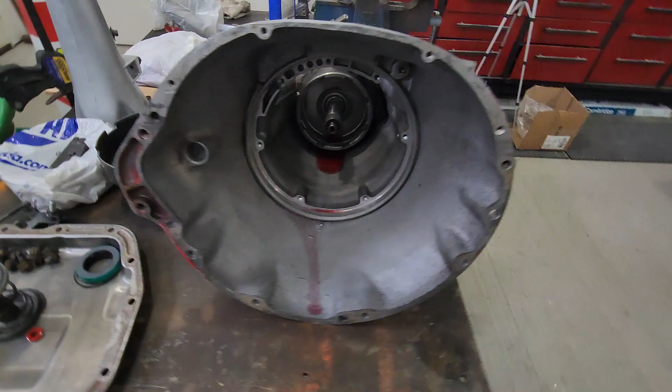So, on to the next step: installing servos into the transmission. Now they are all cleaned and I have all the new seals and gaskets installed, and the steel rings installed as well too. They're all ready to go. So all we're going to do is get this well lubed up and get them in. Hopefully everything goes smooth. I'm going to use my C-clamp again to compress these gently just so I can get the snap rings in. But I don't anticipate any problems, so let's get at her.

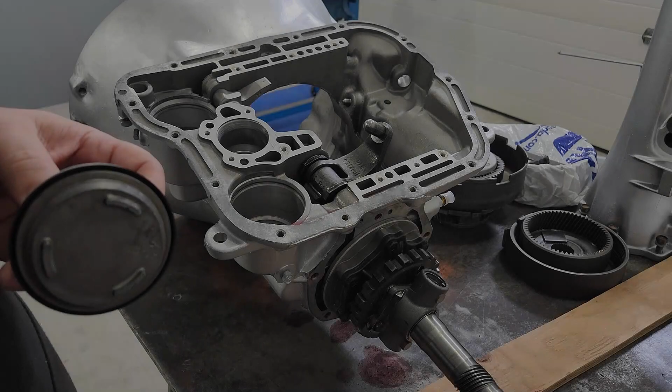So as with everything on here, transmission fluid on all surfaces. Anything that's touching, sliding, moving, anything that's rubber, everything in general. Get everything lubed up nice just to make sure we don't have any issues. We don't want to rip or tear any of the seals at all. We don't want to score things up. We want things to move nice.

So this is the bottom part of this servo here. It was just a lip seal that I had to replace on this. The plunger here, there's a snap ring, but there's no kit that goes in here. So I washed this out. It's moving nice and smooth, so we should be good there. That's that part.

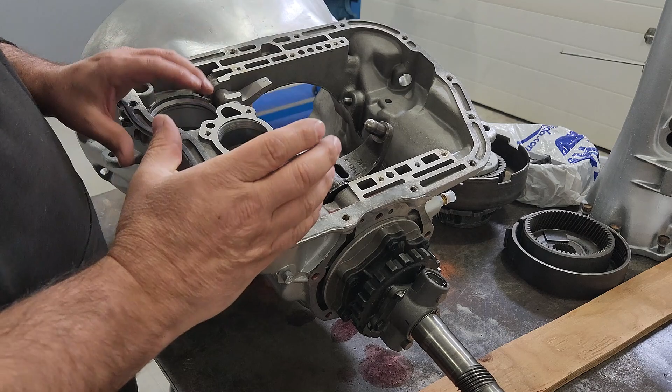Now this one's a pretty easy fit. Nothing too fancy about it. Just gonna make sure you kind of rotate as you go, so that lip seal stays - it's like a cup, it's kind of shaped this way. You want to make sure it doesn't roll up on itself. You want to get it kind of tucked in. There's a tapered edge, so it drops right down nice.

Then we got the spring. And just like anything else, where any surfaces meet, because they're going to be touching together for a while, we're going to make sure we get them lubed up. And everything is good. That all holds in there nice, and this will end up coming down as the adjustment for it. So everything looks good there.

All I got to do now is get my clamp to hold that down so I can get my snap ring in place. Well, that kind of went way faster and way easier than I thought, and I didn't even have to use a C-clamp. I assembled it together, lubed it up, assembled it together. I put the clamp on top and thought I'd see if I could push it down with my hand, and it went down so nice, and I snapped the clip in and it was done. That was it. So that one went in quite well.

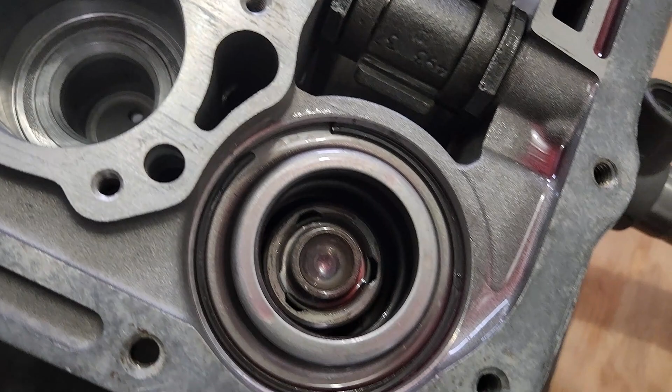So let's see if we can get a look in here, so you can see what the servo looks like inside. That's the part there that's pushing against the spring. As the fluid would build underneath of it, it would push this up. The arm here, which locks into that servo, as that pushes up, this has another lever on this side. There's going to be the brake band on here for the reverse gear. So as you put it in reverse, the pressure builds on this side. As the transmission is spinning, it tightens up the belt or the band on the back side here, causing this drum to turn, putting your car into reverse.

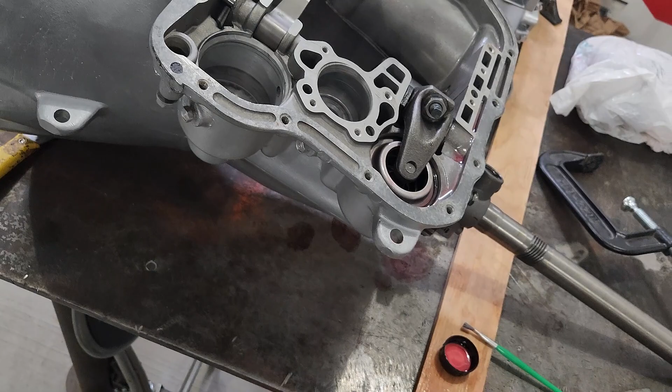I almost said tractor - used to mess with tractors all day. So yeah, it's a pretty simple little setup, easy to go together, not really much to this. I was really worried when I first started taking this transmission apart, but I'm learning real quick that as long as you just pay attention to what you're doing, it goes together quite well and comes apart quite well.

So, on to the second servo.

And that was a bit of a whirlwind that I didn't video. But I have the reverse band in, which required taking the drum out about 20 times trying to get this thing lined up. And I even got my little piece in here that was so hard to get out last time, but I just took up the slack by my finger. And when I pull this outside lever, you can see how that band works, how it jams against that inner drum.

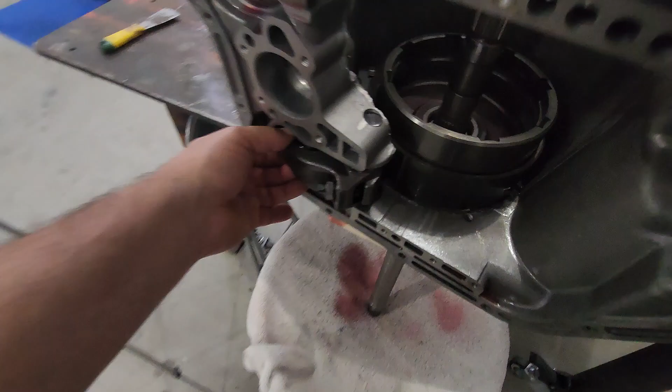So this servo here, the pressure would build, pulling that lever, engaging that drum, locking it in, and causing those clutches to grab and giving you a reverse. But now we're on to a set of planetary drives.

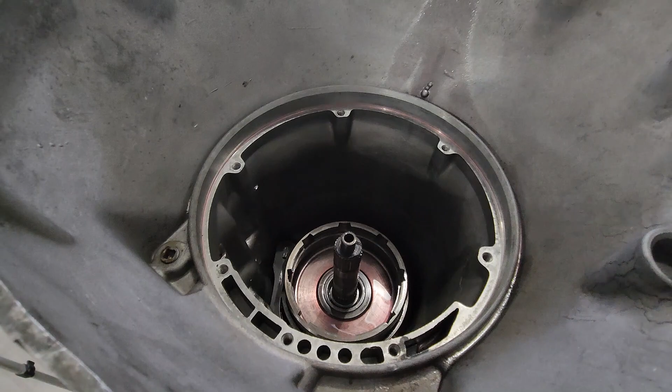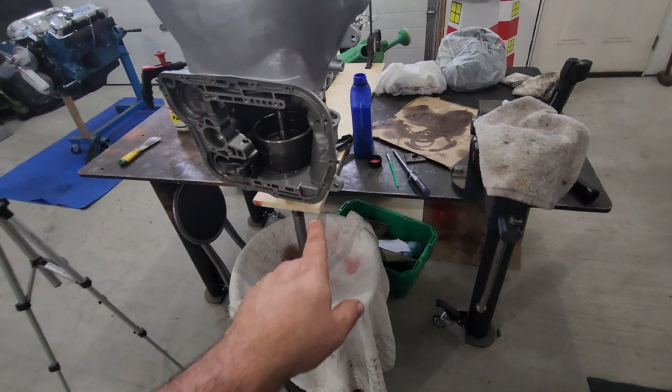I really want to get them in so I get the snap ring on, because nothing is holding the shaft in here except for the weight of the transmission bell housing. Now I did upgrade my board here to a 3/4 inch piece of pine, because I was getting worried that my little plywood one would snap off. So we'll get the planetary carrier, get that cleaned up, lubed up, and get ready to drop that in.

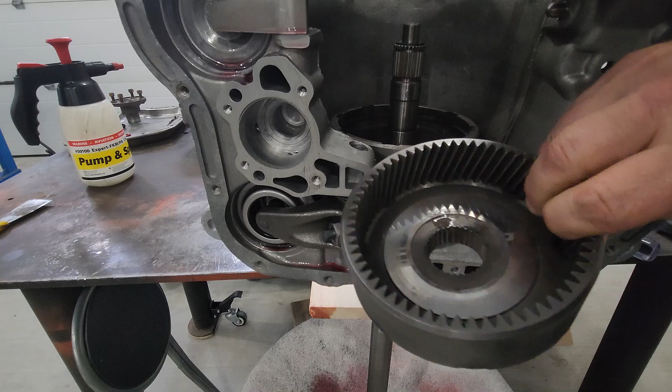These parts should go fairly easy. This is the planetary carrier. I lubed up the little snub nose that's going to fit down inside the shaft there, and also put a little bit inside. We'll end up oiling that up a little better. But it's pretty straightforward. Down she goes, right on the splines, and we are in.

So that's the carrier. Next step is going to be the first set, the planetary going down in there. This is her here. That's the next step. So we're going to get that ready to go here, lube it up really good, get it nice and clean, then make sure there's no issues at all when we drop that down in there.

Get the planetary all well lubed up and gooped, and everything turning just beautiful. There we go, in she goes.

Next up we have the bearing, the drum, the carrier drum for the clutch packs rides on. There it goes. Now there's little notches here, let me get this out to actually show you. See those little teeth hanging off it? There's little holes that they fit right into. Keeps them from spinning, but allows the drum to spin around on that.

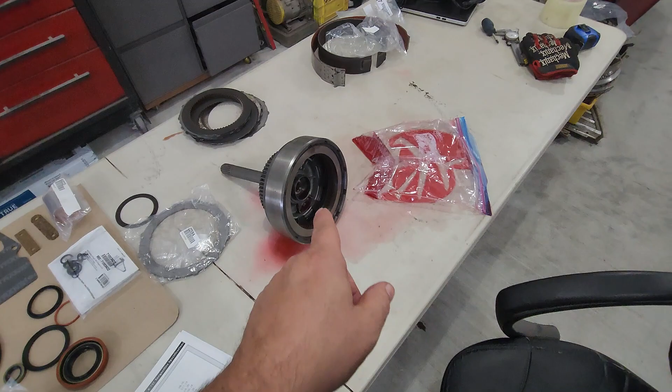Now, my next step is to put in my first set of actual clutch packs, and hopefully I can line all the teeth up, because they all got to fit down inside here.

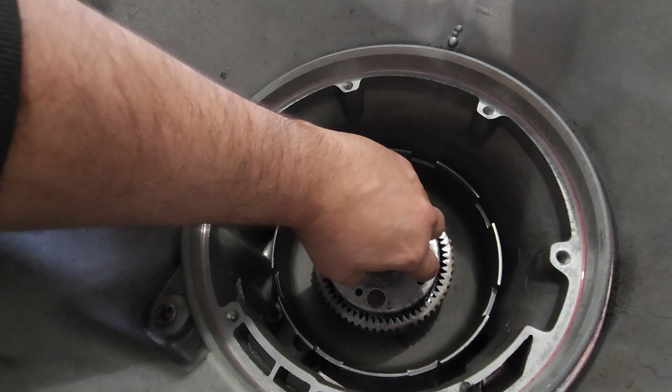Now, the first order of business, very important: make sure our little fiber spacer washer is in here. Make sure that's on, and it's all well lubed up and good in there. Nice and clean, everything else is clean, looking good.

I have all the planetary oiled up well. I'm going to put some more on the outside of the teeth here, the splines, just to help it slide into the clutch a little better. But we're going to get that first clutch drum, slide it in, see how it goes.

All right, we got her well lubed up again.

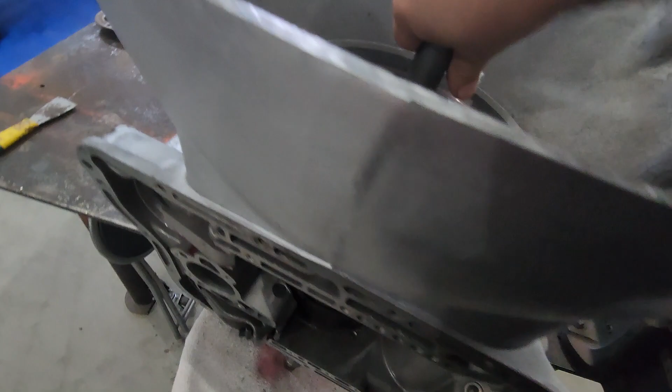Oh, there it goes. There's another disc. We are in. All 4 discs are lined up. Well, I think I got pretty lucky on that one. Oh, there it goes, the last little click. We're definitely in. That went way better than I was expecting.

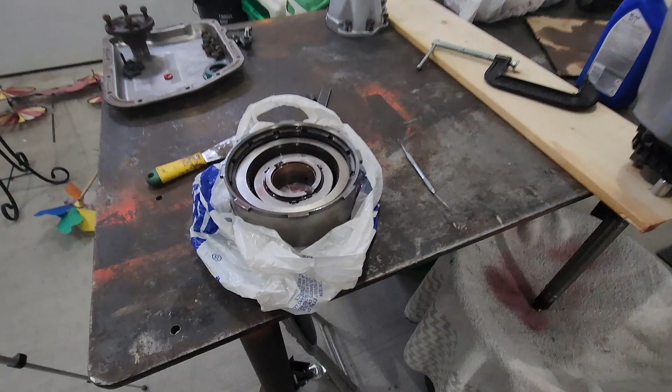One more to go. All right, forward clutch pack going in. It's getting tight, putting both hands in here, working it all together, but we are getting it done. So far, everything has gone together fairly smooth, not too hard at all.

And hopefully that's a good thing. As I'm going, my parts are disappearing, which is awesome. This better be empty when I got this whole thing finished and put together, because I don't want any surprises once this is all done. But, gotta get this on. I went with a pick and lined up all the teeth on the clutch disc the best I can. I'm gonna slide that down, getting these lugs to fit in on the drum. Hopefully they'll all seat in fine. Not much I can do to record it, so we're going to cut back when she's all finished.

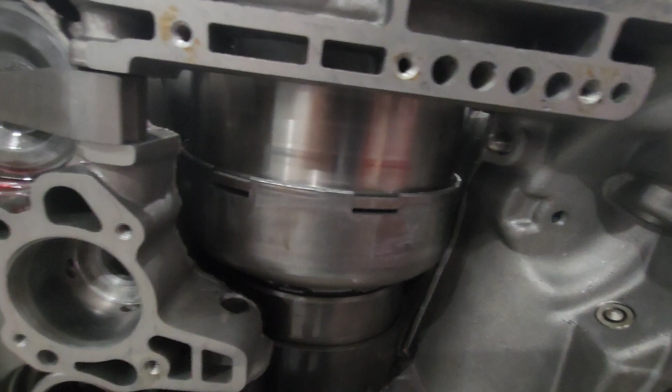Well, I'm having trouble. I cannot get the last disc to line up on this thing. Of course, the more discs that go through, the harder it is to turn the shaft, because I'm trying to turn the entire transmission. So you can see I got a gap here. If I grab the shaft on the inside, it rocks really easy. Now it should be sitting on a bearing face as big as this, so it should be no rocking at all. It should be a nice flat surface.

So I've taken it off, and I've seen that the last disc up in there is just a little bit out, but I cannot seem to get it to stay together. I set them up all perfect here. By the time I get them in there, just a bumping and wiggling, they're out of place. So I'm not really sure what to do, but trial and error, I guess. Pull it off again for the whatever millionth time and try it one more time.

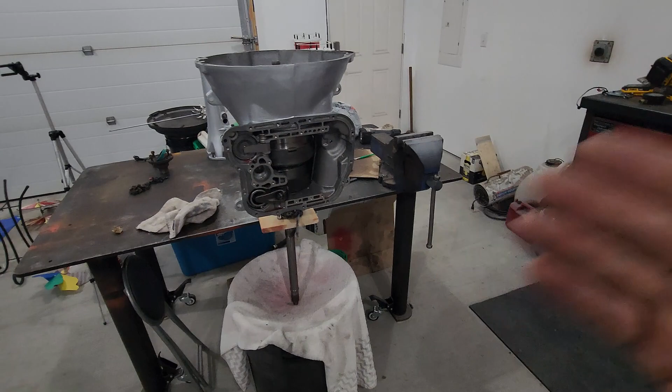Well, I did a little tidy to reassess my situation about this clutch pack. And I did take it out 2 more times, trying to figure this out. And the whole time, I have the answer sitting right here. I never even thought about checking the book, getting frustrated, thinking one thing, and just hitting out that problem and coming up to the same conclusion. It is not going in.

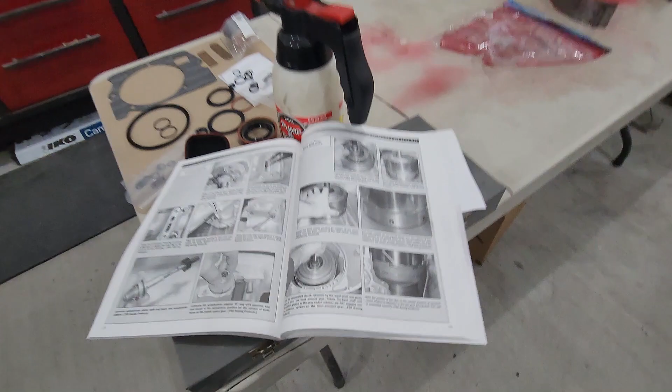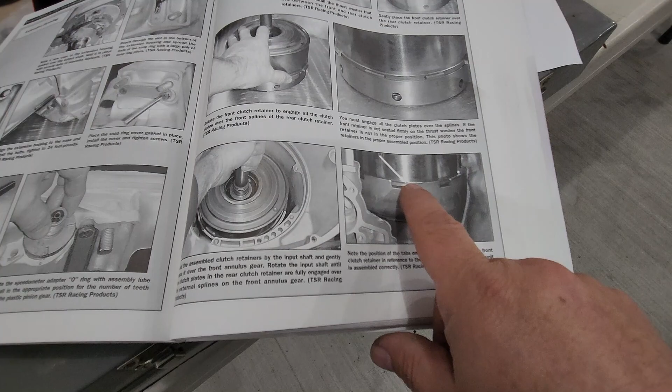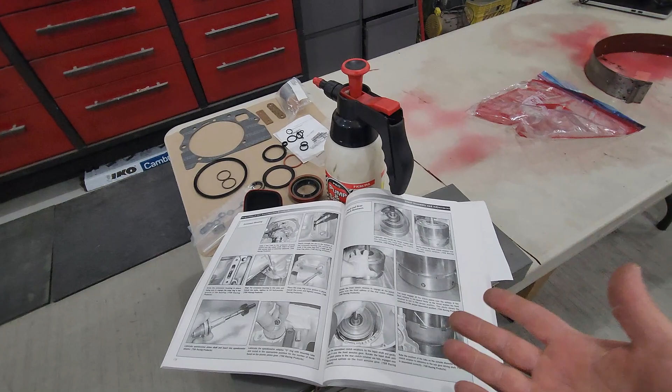Well, so 4 times ago, I had it correct. The book states that when this is connected properly and put in, these tabs are actually just about level with the top of this drum. Just like I have it now. They should be right at the top. This is considered normal. Being stubborn and getting frustrated got me nowhere, when really I should have just checked the book, because that's what I have it for. So I do have the front clutch pack installed correctly with the correct spacing.

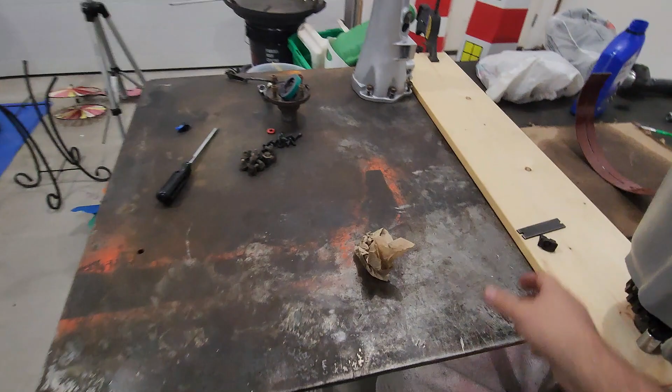So now that we have solved the problem with the forward clutch pack and got that figured out, and we know we're good to go there, now we're on to the front band. This has been soaking for quite a while now. Just let it drip off a little bit so I can bring it over here. We're going to assemble that, get that in there, and hopefully everything lines up good. Let me get the pieces on and get it all locked in there properly. It's going to be fitting between this little control cam here and this nub here, which is the adjustment screw from the outside, and that's what's going to be pushing it together to take up the slack.

It's pretty easy to adjust this initially, to set it. The book is pretty clear about it. So we're going to drop that down inside there and see if I can get it lined up. And slick as that, the front band is in. Now that was real easy going in. Now there's a top and bottom. This is that aftermarket band, so it is a little different than the original. It has a cutout around the center and holes drilled through it all the way around, which is more of a performance enhancement thing they've done over the years. So the new band I got in there is supposed to be better, supposed to grab a little tighter.

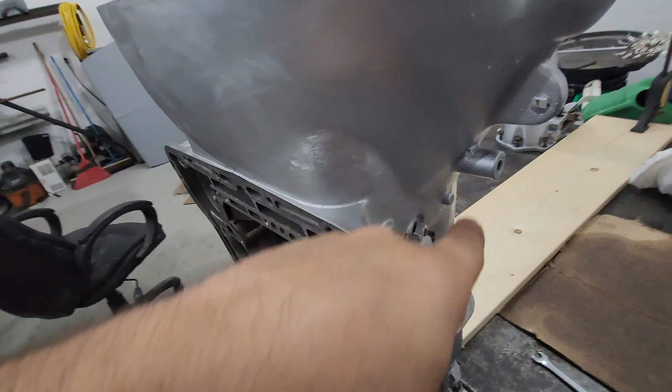So with the band in, we've got this adjustment bar, or push bar, and this side is the adjustment lever that goes to the outside of the transmission down here. That's where we'll be setting our tension. I just got it finger tight, which I can still barely wiggle. I don't want to get it too tight yet because I still have to put my pump in the rotor, and I might have to turn that a little, so I want to make sure I can turn this by hand. So it went together good.

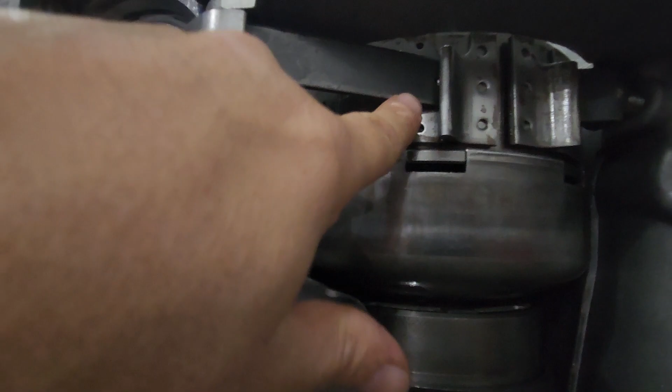Like I said, there's a top and bottom, you can see how offset this is. Of course, that has to be as straight as you can from the pushing here from the servo, and the same goes with the little wedge here that adjusts it on the other side.

So now it's time to grab the pump. I'm going to unwrap that pump and make sure it's clean. I've double checked this surface, it's still clean. We'll lube this a little and get ready to drop that pump on.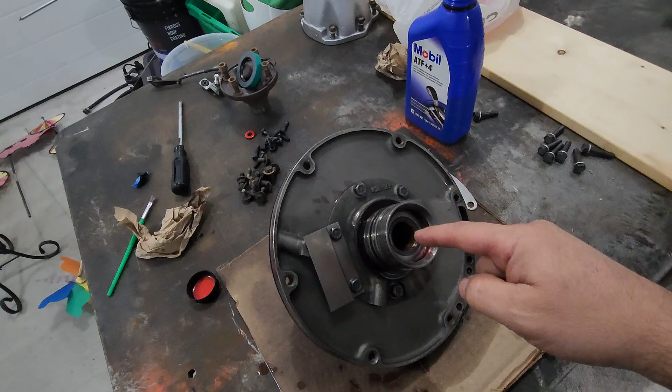All right, I have my pump prepped. Got everything lubed around the outside of the pump, the drive, the center drive. Got the inside bushings lubed, and I went around the outside of the ring here as well. Don't forget your spacer here that it rides on. Inside again, cleaned, well lubed, all down inside. And I got my gasket set in here, and I also got a little transmission fluid all around the outside, just to make sure I don't roll this seal over.

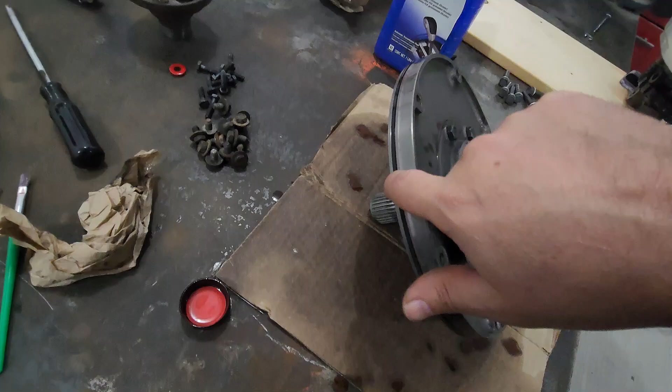This is not round, it's square, so you want to make sure when you're pushing it in, it's not going in dry and hooking the edge and rolling it over. It'll end up cutting it, because there's no clearance at all in there. If you don't get it nice and lined up and lubed so it slides in nice, it'll roll that seal and shear it right off as it's pressed down in there.

Pump is in and torqued down. It went in smooth, no problems at all. I just made sure that as I was setting that down in there, my holes were perfectly lined up so there was no turning of the pump to offset my gasket. It slid right in, I put all my bolts in, just finger tightened them and then snugged them up with the ratchet, gentle, until it sucked that pump down, working a crisscross pattern just like if you're doing the tires on your car.

And then they got torqued down to 150 inch-pounds. Again, light - all the bolts inside this transmission are low torque. But I guess that's what the big book says, and I'm not going to doubt it. I'm going to stick by my Bible.

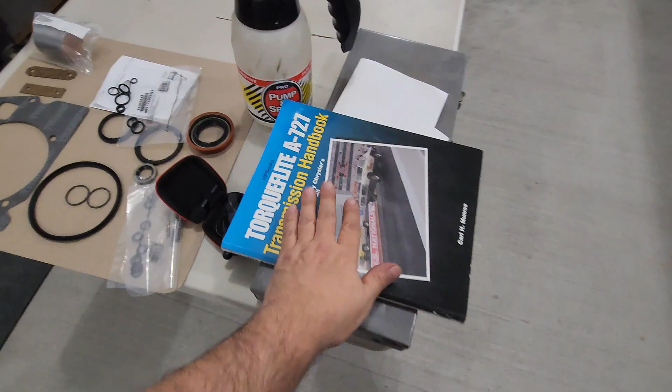So now, man, it's coming together real good. But I've got to get this thing out of here and laid down onto my table, because now it's time to start getting ready to put that valve body in.

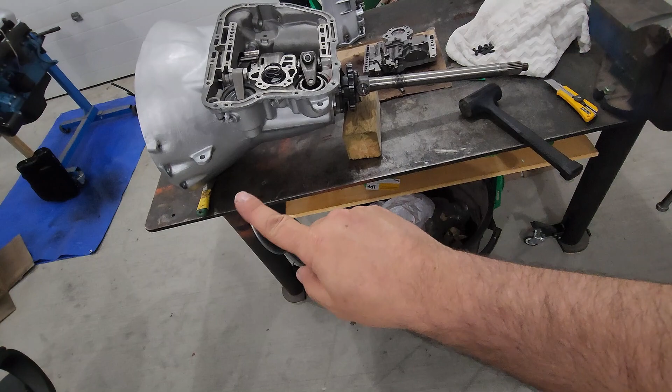All right, that transmission is laid down and supported right at the base here to the end. We don't want to lay it down full length from the tip of that shaft to the end of the bell housing, because there's no bearing other than here. There's no bearing holding that shaft straight, and inside, with that stub shaft end, you'll be forcing it up onto the bronze bushing that's in there. Until we get the tail shaft housing on, there's no other bearing to hold this thing straight between the two.

Now on here, this is the separate shaft on the other transmission, and they're connected just by a nub as big as the end of your finger. So when that one pushes up and bends on that brass bushing, this one's doing the opposite, pushing the other way, and it'll be pushing those bushings too. So we're going to make sure we keep it off the end of that shaft, just with the weight of it hanging there. That gives us the ability to get our valve body on.

I have my servo in already, just the same as I did the other ones. Tapped it in, slid right in. Got the spring on, got my bolts ready, and everything is clean here. I did take off my shifting link - this is the part that the wire, your cable, connects to, that goes out to the side right there. Got rid of that, it gets in the way when I'm trying to do this. I'll set that into the other side, put on the nut, and then we'll be good there. Everything is lubed. I'm going to put a little bit more lube on this, but it should be ready to go.

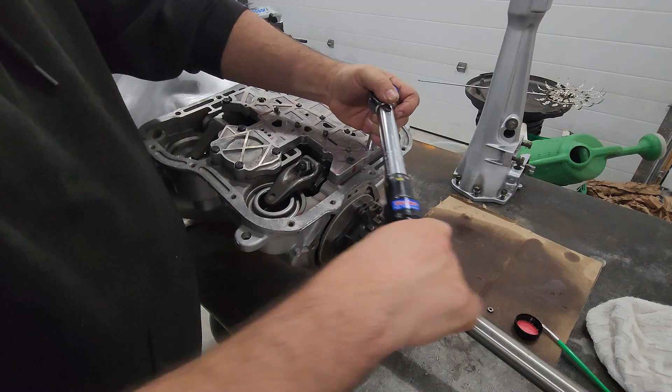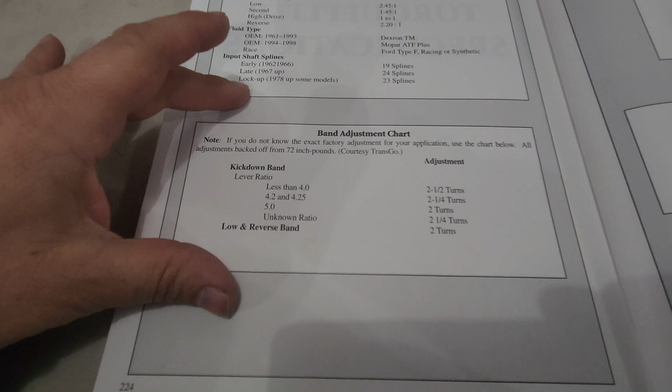So our next step is moving in, adjusting these low and reverse bands and our front kickdown band. Now it's pretty straightforward, we do want to make sure that we are doing this correctly. And there's something going on here with the kickdown band.

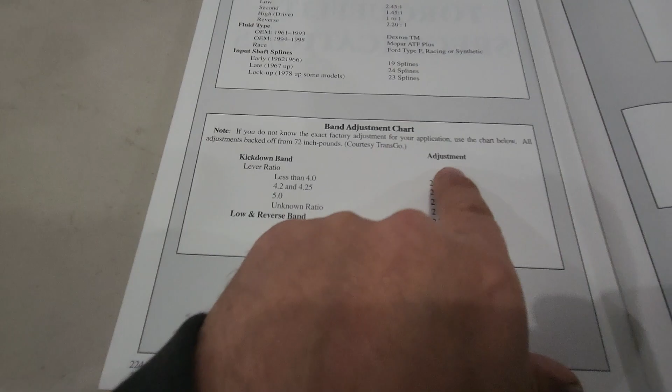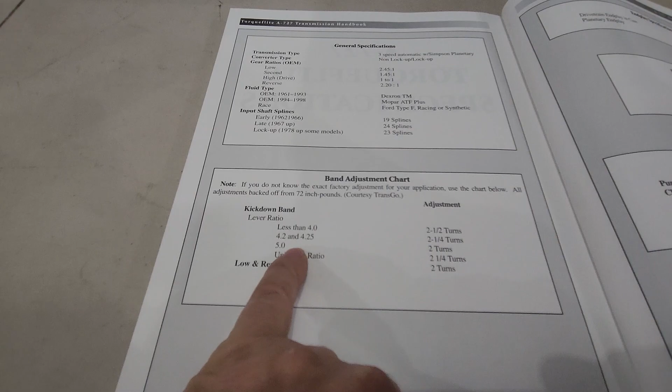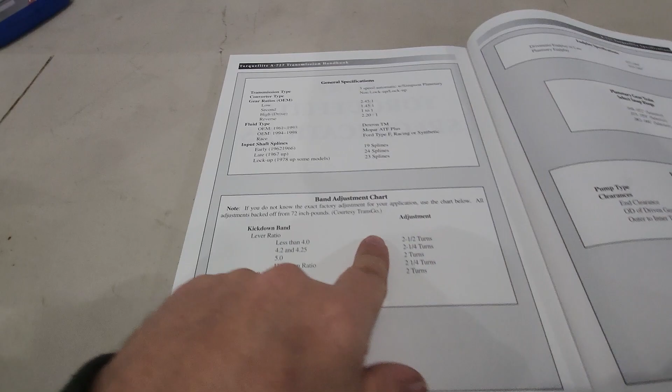That's the big front one. There's multiple options to set this thing at. I did some research just trying to look at this transmission, getting some information on it, and I cannot come up with the numbers that they're reading here. Something tells me this has to do with application depending on which car it's in, heavier car, lighter car, if this is actually in a truck or something like that. Probably how tight that thing grabs when you push the pedal down and it cuts in, when it kicks in and takes off - I'm sure that's what it has to do with. Now, it does state up here that if you do not know the application method, this is what you follow. So the unknown ratio starts at 2 1/4 turns.

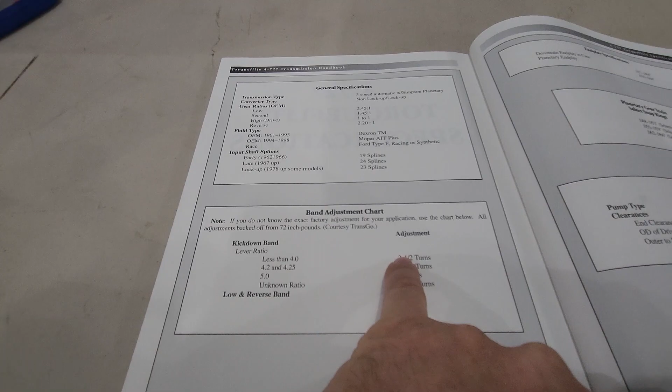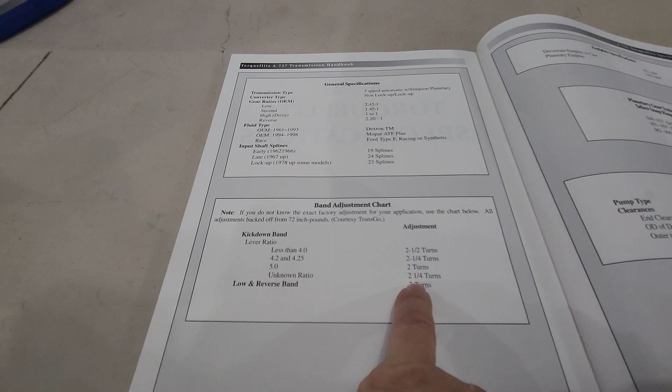Now this is okay. This band, this front band, and these adjustments here, I can do this from outside the transmission easily. I can just reach underneath the car with a ratchet and a wrench. I can readjust this and set this all day long, no problem to reach.

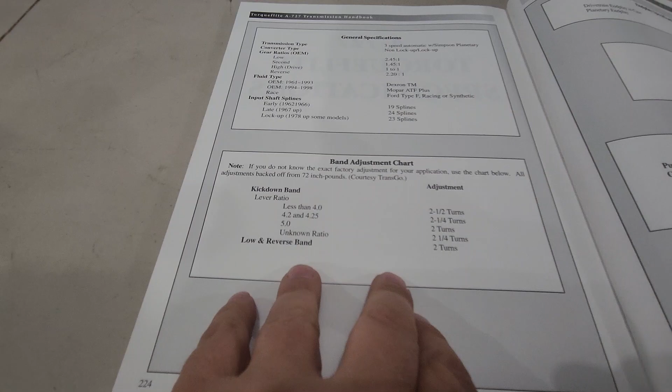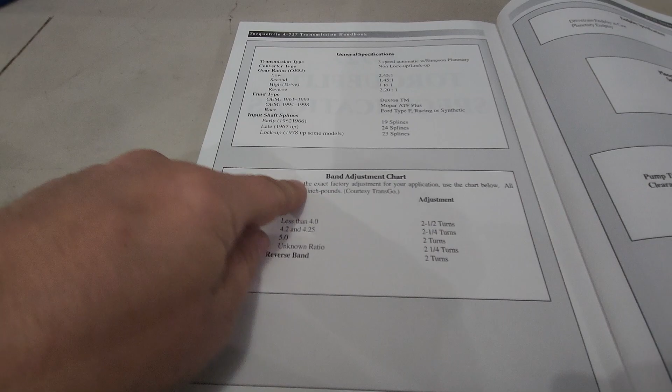The low and reverse band, that is inside only. And in order to readjust this, you'd have to dump your fluid, pull your pan, do your adjustment, probably get a new seal. You might as well change the filter while you're in there, all that stuff. But this one is dead set: 72 inch-pounds, 2 turns off, and that is it. It's supposed to be done. And it's easy to get to now. This is it here, but this is where the pan's going to go on and close it up. So only one adjustment on there, which is good.

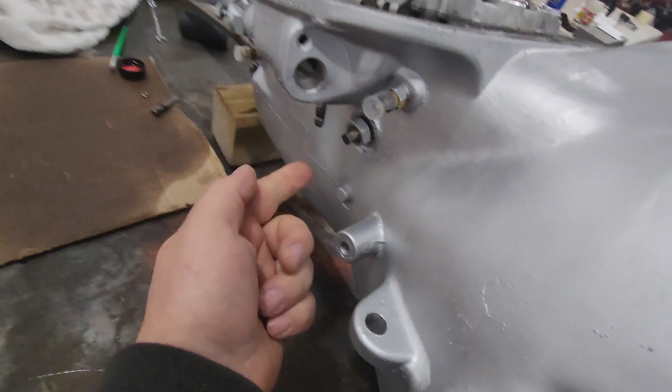This band here, the one that's on the front of the transmission, my kickdown band, that adjustment is on the outside. Very easy to get to, not worried about it. If it's not grabbing hard enough or I find it slipping, then it's something that we could adjust on the side of the road if we had to. But we can come back and take care of that.

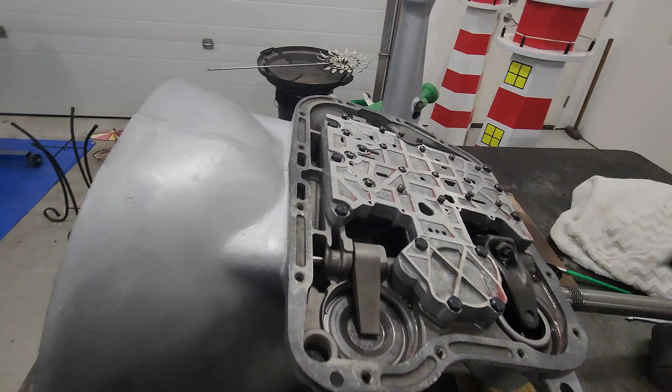Now I was able to borrow a 11/32 stud socket. This is on a 3/8 drive, but it is an impact stud socket. Goes right on there, so I can torque this down and get them set. So we're going with the 72 inch-pounds. We're going to back this one off 2 turns. I'm going to back off the other one 2 1/4 turns.

All right, well that went from great to absolutely sucks in about 3 seconds.

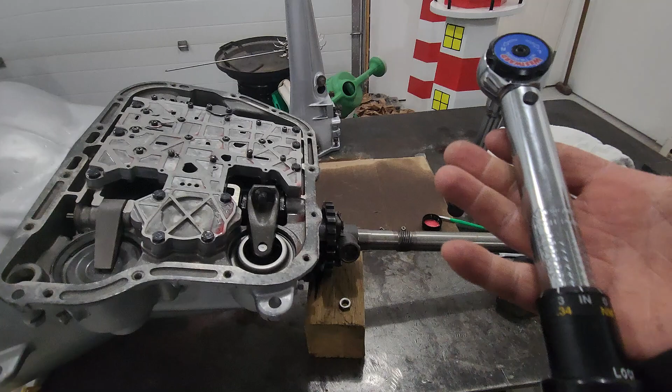Okay, I have my torque wrench set to 72 inch-pounds. Now 72 inch-pounds is not lots - that's how little it is. I can break that out by hand easy. So I started tightening my nut here, my adjuster, and I was nowhere near that 72 inch-pounds. And all of a sudden there was a pop, and the little nub that pushed against the band has popped off and is gone somewheres.

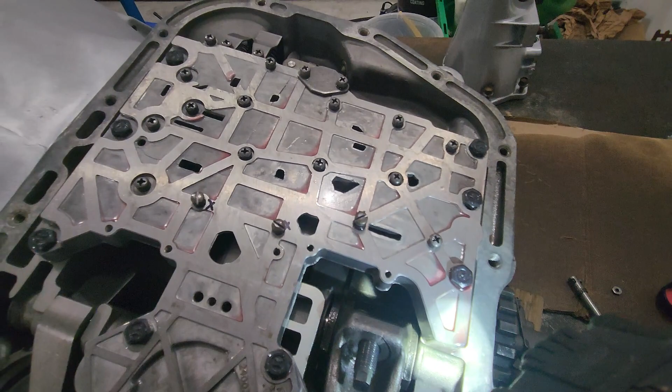Unfortunately, I have my valve body on already. So we're going to yank that off, and hopefully I can get that brought around, because if that lever fell off and I can't get it, the entire transmission's got to come apart in order to get down in there and grab that little adjuster tab.

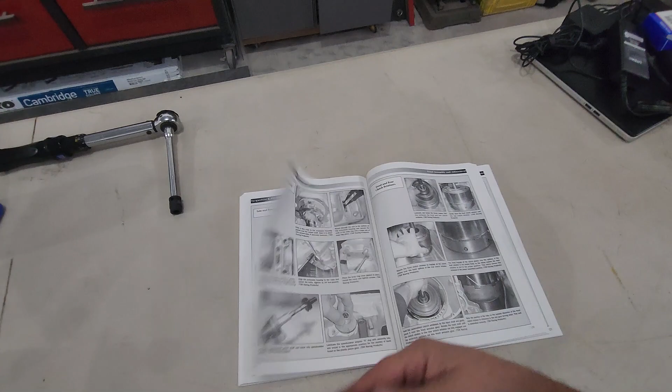Well, I went all back over my book again and shown how to install the reverse drum and the reverse band, and everything I did according to the book here was correct. The only thing I can think of is the little strut, which this piece here, it goes in this way.

Down inside where it rides on this little finger underneath here, it's hard to see. Maybe I wasn't fully in the groove, maybe I was just on the edge of the finger and it popped off, because it is hard to get down in there. Once I start tightening it up with my other hand, I can't really see it anymore. That's my only thought - it wasn't quite seated in there properly. So I'm going to go at it again, get it in, and hopefully that was the issue.

All right, let's get some light on the situation here. I have the strut back in. Sorry about the angle of the phone, but okay - right there at the very end of my screwdriver, that's the strut. Right down here, that is a notch, it goes in like a quarter inch deep. That's where the end of this little strut fits. The other end, you can see it's like a 45-degree angle in there, quite a long edge on it - there's no way it can fall out. So I must have had the strut up on the very nose of this, right on the edge here, and when I tightened it up, it just popped off and slipped down inside. Because the way it is now, there's no way that could ever fall out.

You don't know how nervous I was thinking I would drop that down inside and have to take this thing apart again. But now that we're in the right spot again, I'm going to throw the torque wrench on there, see what happens. All right, we have success - we are now torqued to 72 inch-pounds. And you know, 72 inch-pounds on here is not much, but man, that band is tight. Did that grab good. So that's looking real fine, everything stayed in place. I guess the final verdict is the strut - I must have had it just grabbing the nose of that lever by mistake, didn't notice it, and it popped off.

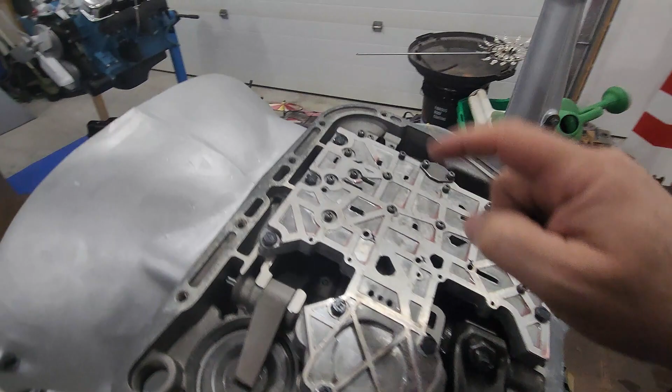So now that it's in there and it's 72 inch-pounds, this is the rear band, so we're going to take this off two full turns, and that should be the final adjustment. So now that the valve body's back in and both bands are fully torqued and backed off where they're supposed to be, it's almost time to close this up. Oh, I did put my little shifter lever - it's in there and torqued down.

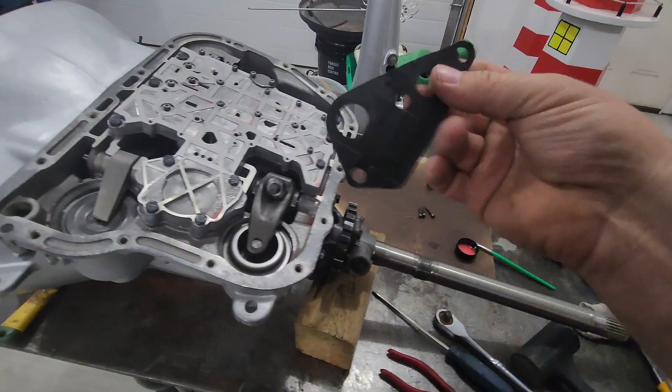Next thing is my filter. We've got the little rubber filter gasket that goes on there, and our filter. Now there are multiple versions of this filter for this TorqueFlite transmission, depending on which one you're using. Mine has the rear pump, so you need to make sure your filter has two inlets to draw from - the pump is drawn from both sides, one pulling from the back and one for the internal pump up to the front. You've got to make sure you have the right filter. The other filter will fit on here, the three holes line up, but the problem is you're starving your rear pump - it's not going to be able to pull enough fluid through this filter mesh to fuel itself. It's going to have to go through the hole where you get the whole surface allowing the fluid in. So it's very important - if your TorqueFlite has the rear pump and a front pump, make sure you get two large holes in your filter.

All right, filter is in place, got them all snugged up nicely. And I went and grabbed my gasket, and I got that all in place.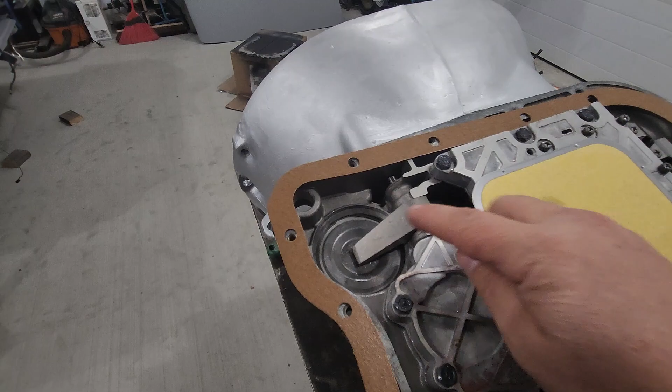Now what I'm thinking though - right here, this is where my dipstick tube comes through, and I'm just wondering if I should actually notch that out. I think I should take the corner out just a little bit. On my pan, it's flat right around that corner, and it's even dipped further than the gasket is right where it goes in. So I'm going to mark this out, push on it, see if I can get a line. I'm going to take a little bit of it out because the dipstick tube hangs down quite a bit, and I don't want it chewing on this, knocking pieces off into the system. Also when you push the stick in, I don't want it chipping at that.

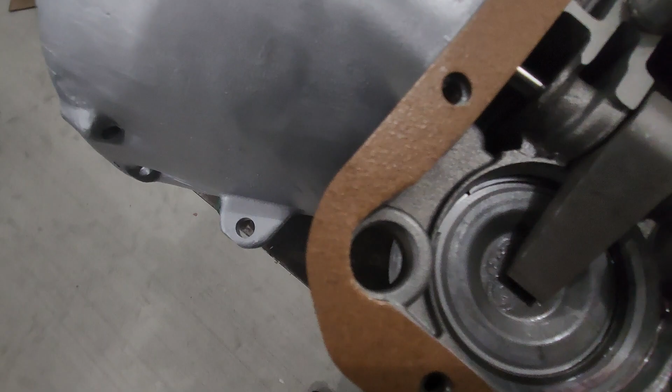And there we go, just a little tiny piece I cut out, nothing big. But now with this lined up, I'm away from that hole, so that'll be good. When this comes through, I don't have to worry about chipping off that little piece and having it going around in there.

So now all we got to do is throw the pan on, which is a little bit shiny. It's the original pan, I just cleaned it up, threw some rust primer on it, high heat, and threw on some high heat engine enamel. I don't know, I'll never see it again probably, hopefully, but you know what, it'll be nice underneath there.

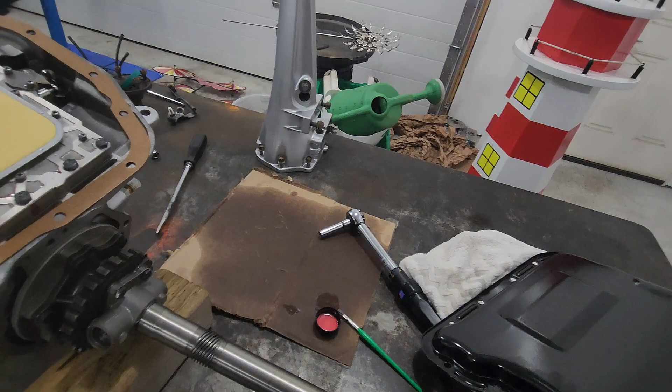Oil pan is on, looking good. So all those bolts go into 150 inch-pounds. So I went around it once, then I went around it again. And what I'll do is after this sits for a couple days, I'll go on it one more time as it seats that gasket and it slowly squishes it down.

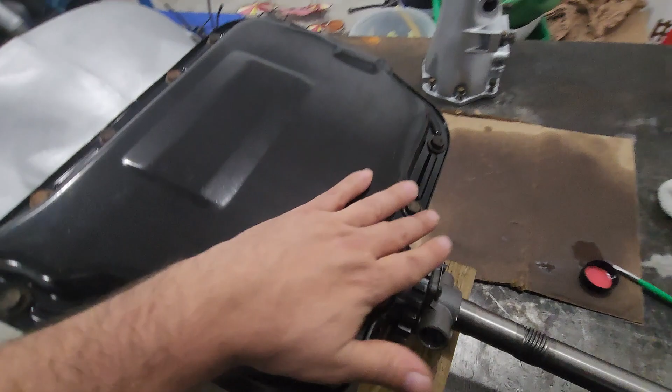But now it's time to stand this thing up and work on that tail shaft.

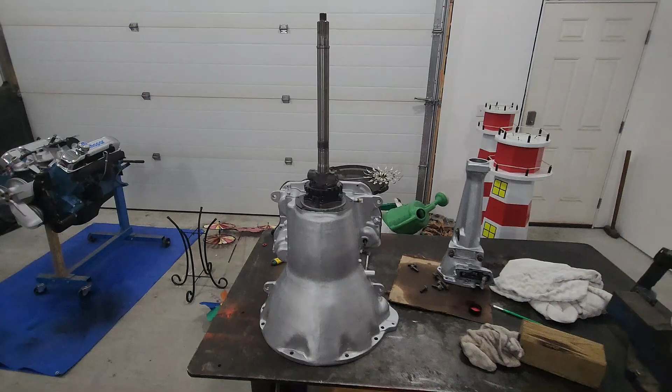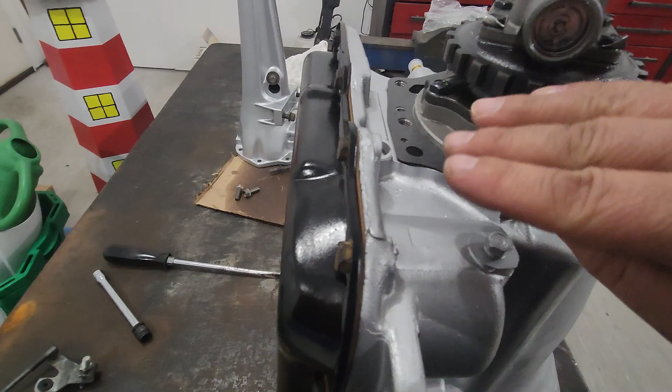All right, transmission is up and time to fit the rear tail shaft on there. So I got my gasket all lined up here nice, making sure I'm not covering any of the holes. This does fit the other way, but it does not line up with this little hole here on each side, so make sure you get that in the right spot. Everything looks good, tail is ready to go on.

All right, these bolts get torqued down to 25 foot-pounds and they are done. The tail of the transmission is on. Looking good, looking real good.

So next step, we're gonna lube up our bearing, gonna tap our bearing inside here, got a snap ring, then we'll put on our oil seal.

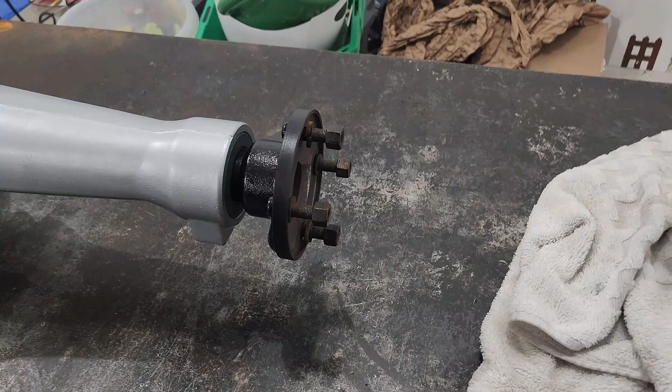Well, that piece of the puzzle's done. I end up putting bearing in, my snap ring, my seal, and I even torqued on my rear yoke. Now this gets torqued on to 175 foot-pounds, which was a bugger of a thing to hold this transmission down on the table and do that. I end up putting a punch between my studs there and got it.

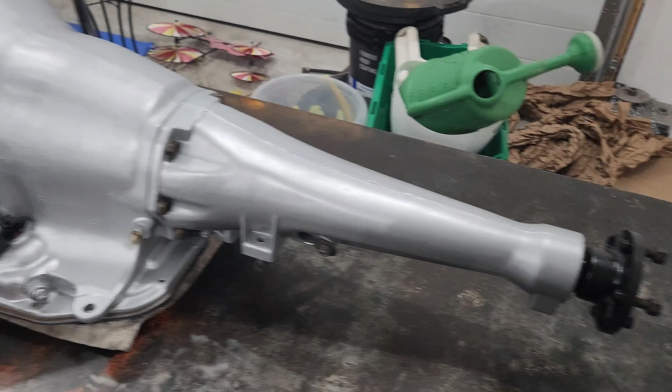Transmission is complete. I installed my kickdown linkage, got that all in nice. I even got my torque converter in, got it back, got it in. I don't think I even, I can't remember if I did the unboxing video of that or not. I have it on my TikTok, but I don't know if I put it here.

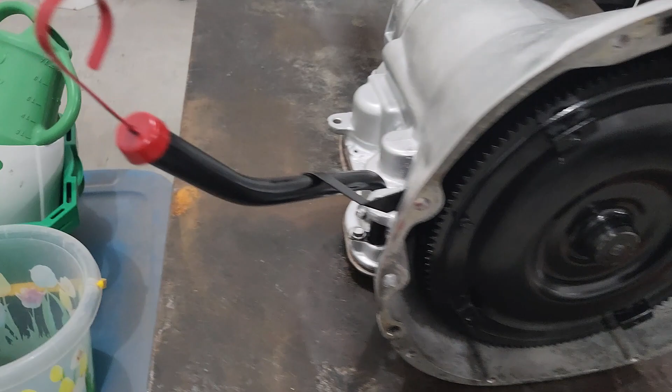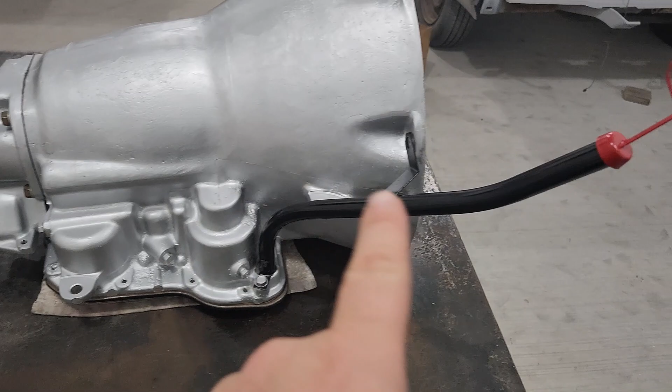And of course, my dipstick tube. This is the original tube for the transmission. I ended up throwing that in the sandblaster, cleaning it up, cleaned up really nice, redid the top, did that in red. I think it looks sharp, I think it looks really sharp.

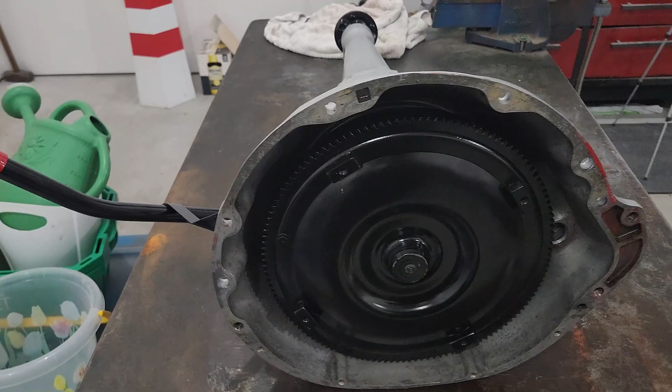But that is it, that is the complete build of the A727 TorqueFlite. Man, am I ever happy to have that done. A little nervous at spots, but we got her together. Everything went together as per spec as the book showed. Everything runs smooth, I turn the shaft and it just feels beautiful, just like butter inside there. Of course, we're not going to really know until it's on that engine and that engine's putting out some horsepower, throwing it through it. But anyway, I want to thank everybody for following along. Thanks for the subscribes, thanks for the comments. That's all I got for you this week. Catch you again later.